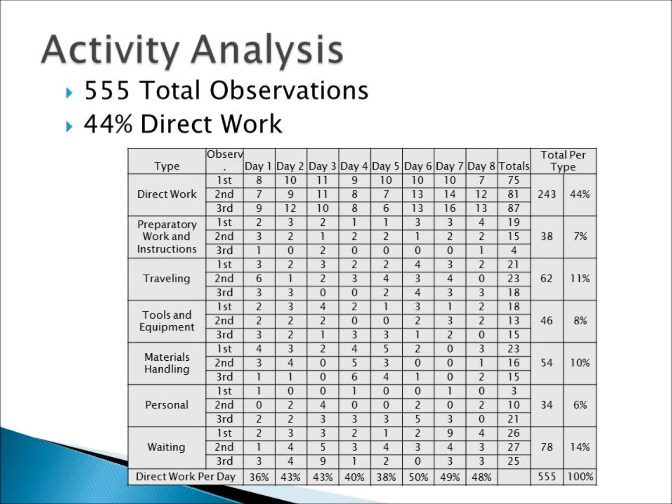For the activity analysis portion of this project, I collected 555 total observations, of which 44% of that was direct work. On this slide, this table includes not only the data from each observation, but the percentage of the direct work per day at the bottom. You can also see that I broke out the percentages of direct work on each observation of the individual days. The direct work varied from 32% to 59%.

The higher percentages of direct work on especially day 6 and day 7 and day 8 were based on activities such as concrete, slab prep, and pour. These activities involved the majority of the workers on site, so it skewed the results more toward those activities. I believe that the direct work percentages wouldn't have varied as much if there were more workers on site and more trades observed.

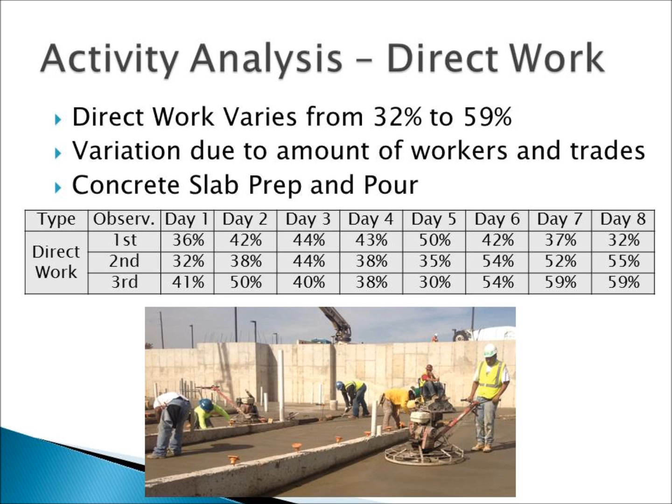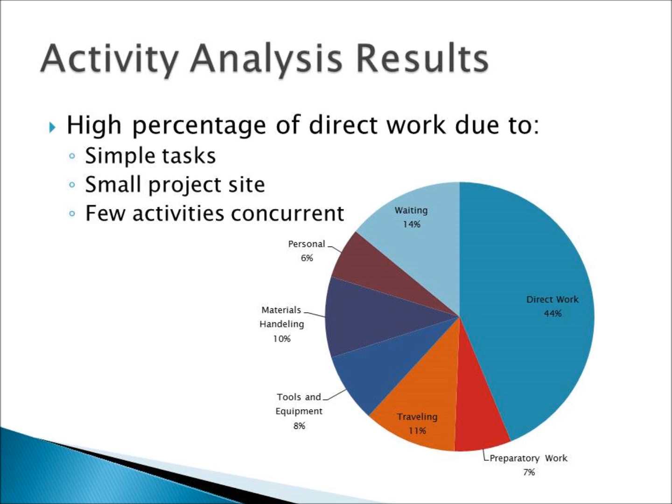The activity analysis results again showed direct work accounting for 44% of the total data collected. This seems like a high percentage of direct work compared to the other data and literature presented in this class so far for construction. I believe this high percentage of direct work is due to 3 reasons. First, simple tasks were observed in this data collection, which did not require much preparatory work. Second, it was a small project site, which required less traveling, tools and equipment, as well as materials handling. Lastly, few activities were run concurrently, which allowed for less waiting to take place.

For the activity improvement part of this project, I chose to observe the masonry activity of building a stair tower. At first, I collected data that was inconsistent due to the large crew size and lack of management of the masonry contractor, but that masonry contractor was shortly replaced, and I observed the new mason, which did have a repetitive cycle, where the 5-minute ratings were very similar. This activity was limited in size and restricted to a small part of the job site, which made it a good activity to observe for this project.

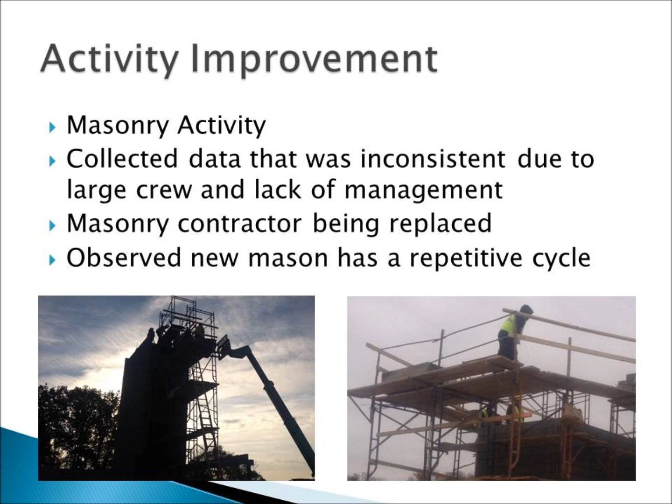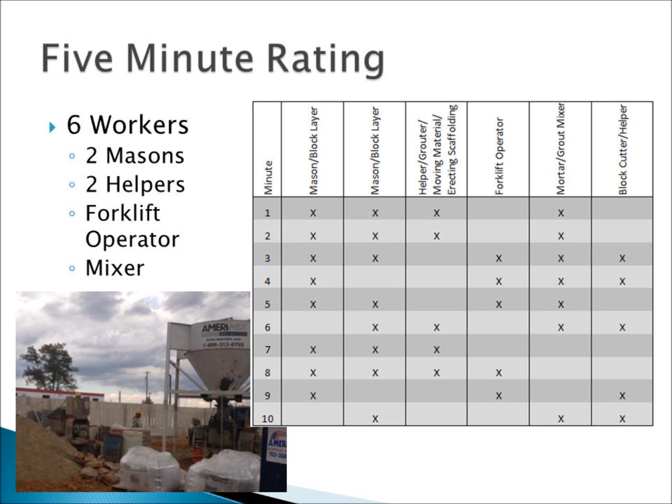For the 5-minute rating, I observed 6 cycles of 10 minutes of the masonry workers, which included 2 masons, 2 helpers, a forklift operator, and a mixer. Based on the observed 5-minute ratings, I created the crew balance chart on the left showing a 63% crew effectiveness. On the right is my proposed crew balance activity improvement chart showing an effectiveness of 76%.

For my proposed improvement, I combined the tasks of the 2 helpers, which included cutting the CMUs and unloading the material from the forklift. This proposed improvement is 100% viable because both of the helpers were on the scaffolding and in the same vicinity while doing their tasks.

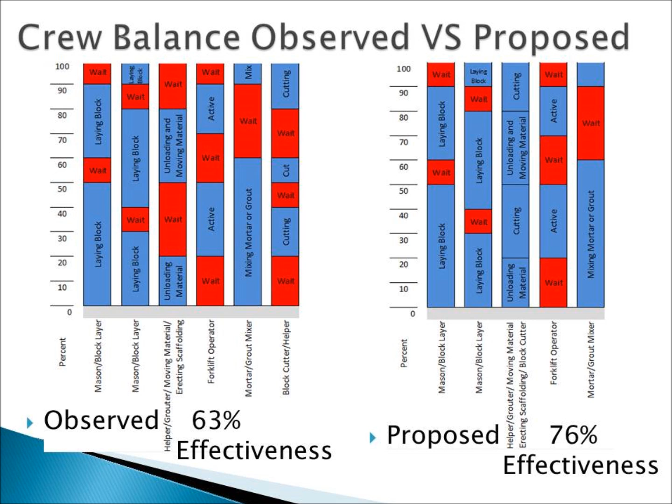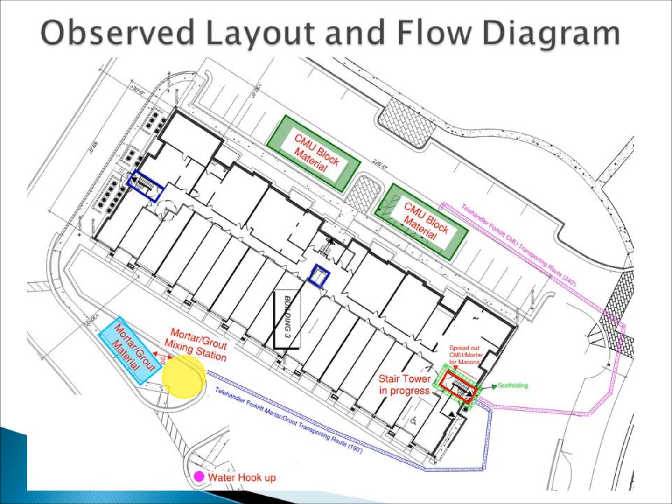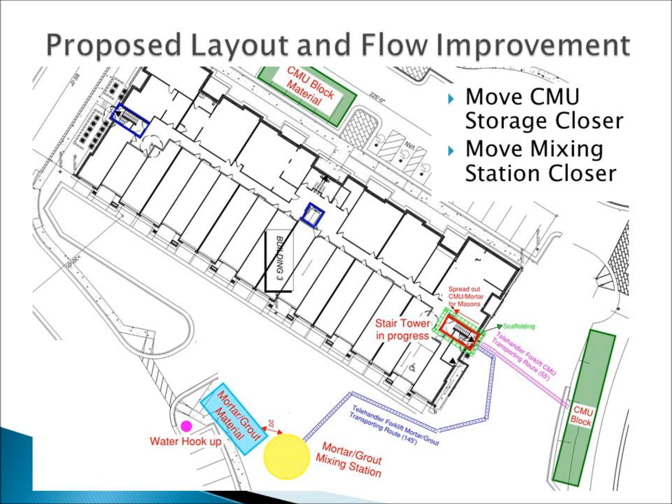This is the observed layout and flow diagram of the masonry activity that I observed. You can see that the CMU transporting route and the mortar and grout transporting route for the forklift are both very long distances and away from the activity. This is my proposed layout and flow improvement, including moving the CMU storage closer and the mortar and grout mixing station closer to the activity. The CMU block was delivered in multiple deliveries, and some of the later deliveries could have been delivered closer to this stair tower rather than the other side of the building.

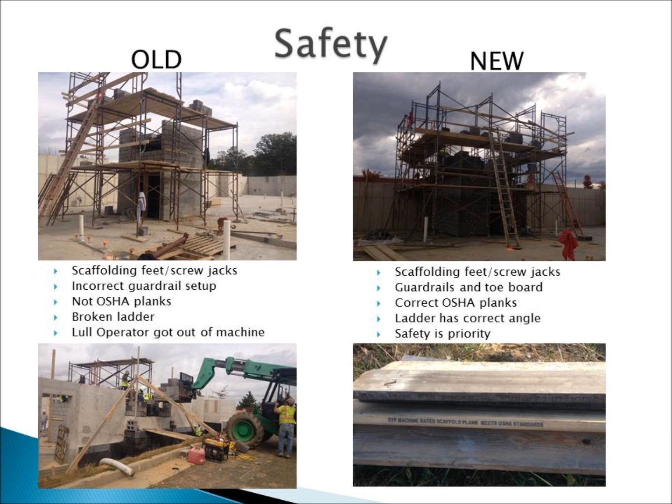Most of the safety observations made on site were of the masonry contractors. The first mason on the left, you can see, did not have a high regard for safety and actually was replaced by the contractor on the right, which actually used the proper techniques for setting up scaffolding, including using the right scaffolding planks. Some of the other safety observations made were of the concrete subcontractor, including incomplete and non-compliant handrails

and a non-compliant ladder made of 2x4s. In order to make that ladder compliant, they would have to add blocking in between the horizontal 2x4s to make it strong enough for a person to walk up and down.